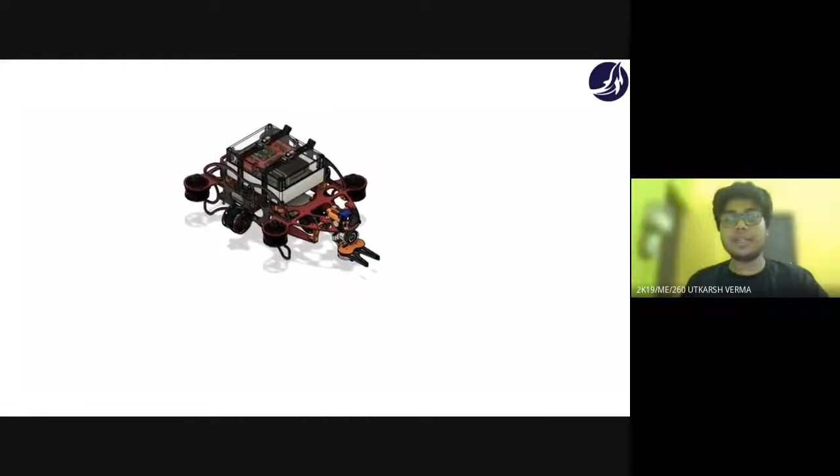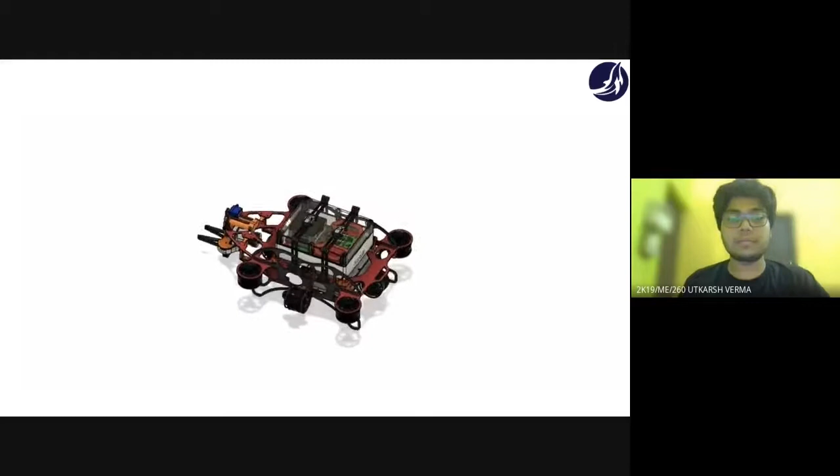I'm Utkarsh Verma, a second year mechanical engineering student at the Delhi Technological University. I was responsible for the design of the chassis and manipulators of the vehicle. Hi, I am Saurav Ranjan, second year electrical engineering student at Delhi Technological University, and I was responsible for the power distribution system in Lapras.

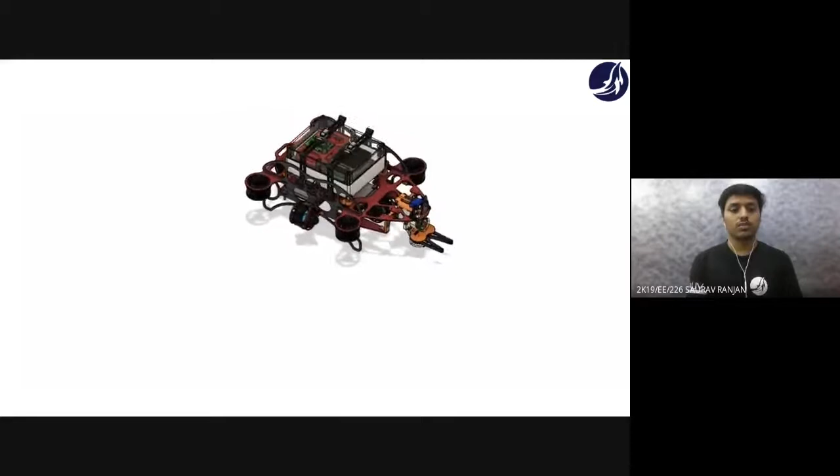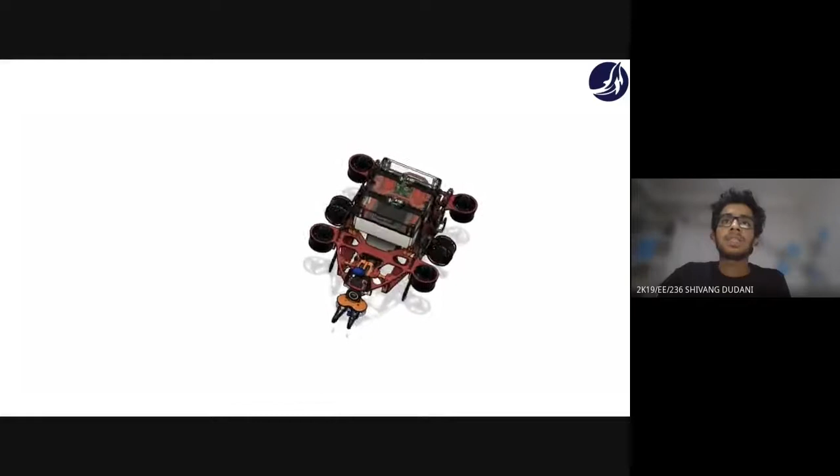Hello everyone, my name is Shivang Dudani and I am currently in second year studying electrical engineering at Delhi Technological University. I worked on the battery management system of Lapras. Hi, my name is Sriram Chava and I am a second year electrical engineering student at DTU. I was responsible for the development of the higher level control subsystem of Lapras.

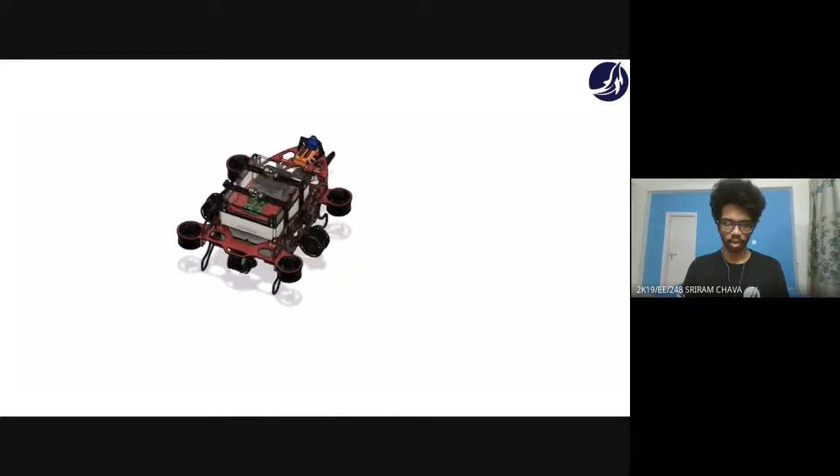Since the revival of DTU AUV in 2016, 2021 will mark our first time participating in RoboSub. Therefore, our approach to developing Lapras was to aim for a minimalistic design capable of all tasks, which would give us valuable lessons for future competitions. Compared to our previous vehicles, we have designed an economical, compact, and lightweight vehicle, which is a significant improvement since it incorporates an acoustic stack and 6 degrees of freedom.

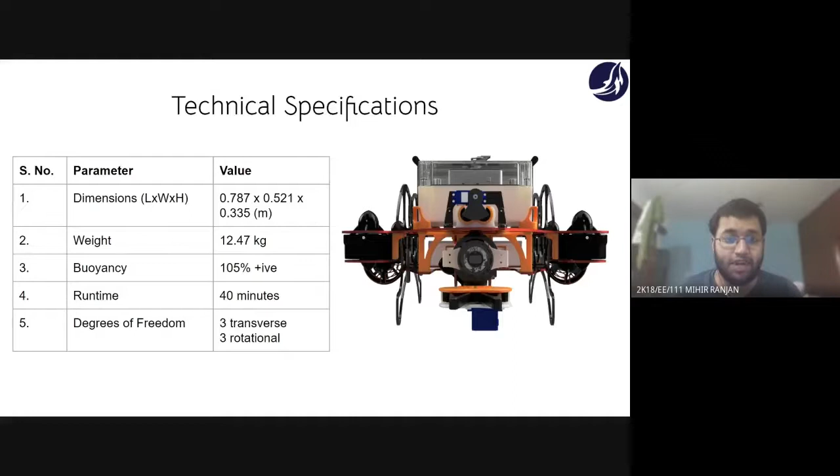The frame of Lapras is the main supporting structure in the assembly and is well optimized to avoid stress concentration and to sustain the loads without any considerable deformation or failure. It uses 4 mm thick 6061 T6 sheets as the material. Since the frame is based on a plain truss structure, water jet machining is used as a manufacturing method, and this sheet metal structure is supported by custom brackets.

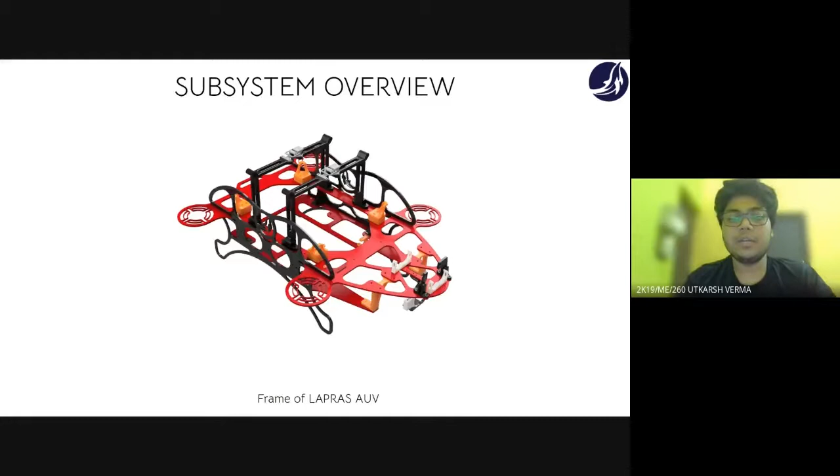The base plate supports the electronics hull, the front camera hull, 4 heave thrusters, 2 sway thrusters, torpedo launcher, and the gripper. Each side plate holds a surge thruster for a total of 8 thrusters on the vehicle. The bottom plate supports the battery hull, bottom camera hull, and dropper. The design of the frame ensures easy assembly and accessibility to every component attached to it. Since 4 thrusters are used for heave, the thrusters are allowed to run at the optimal PWM values, giving higher efficiency while submerging.

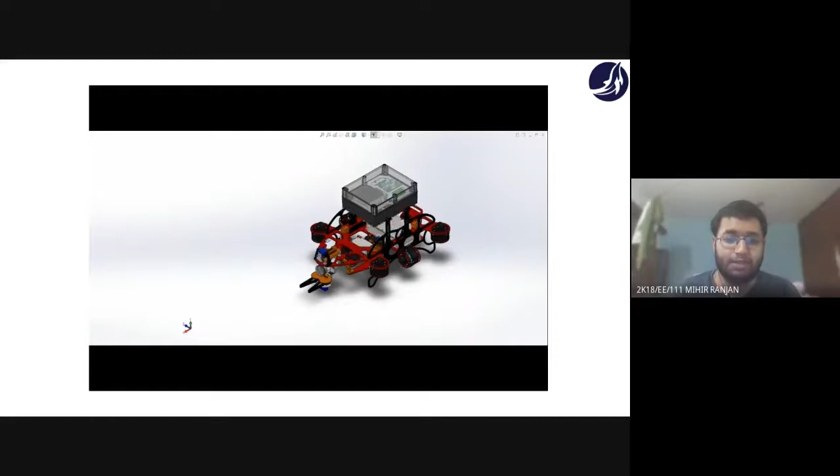Since we're targeting all the tasks, a major challenge we faced was reducing the complexity of the system while keeping it compact. From previous vehicles, most of the bulk in our system was a consequence of extensive wiring inside the hull. Over the past few vehicles, we have aimed to reduce this wiring by utilizing custom developed boards and PCB traces for both signal and power distribution. The boards are kept apart to avoid interference between the signal lines and high current power lines.

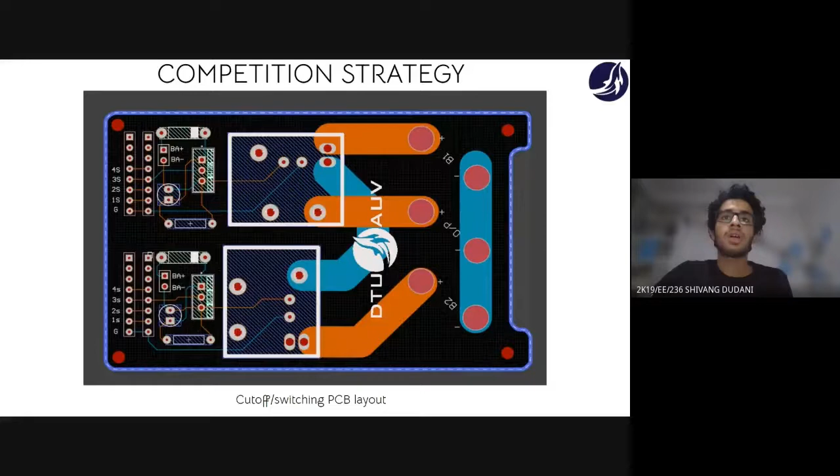Power management in Lapras is done by the power subsystem. The main power source of the vehicle is two 4-cell 10,000 mAh LiPo batteries. These batteries are placed in an aluminum hull to allow better cooling and easy replacement of batteries during testing. At a time, only one battery is used and a custom battery cutoff and switching board was developed to cut the main battery and hot swap to the backup battery to prevent deep discharge for both batteries.

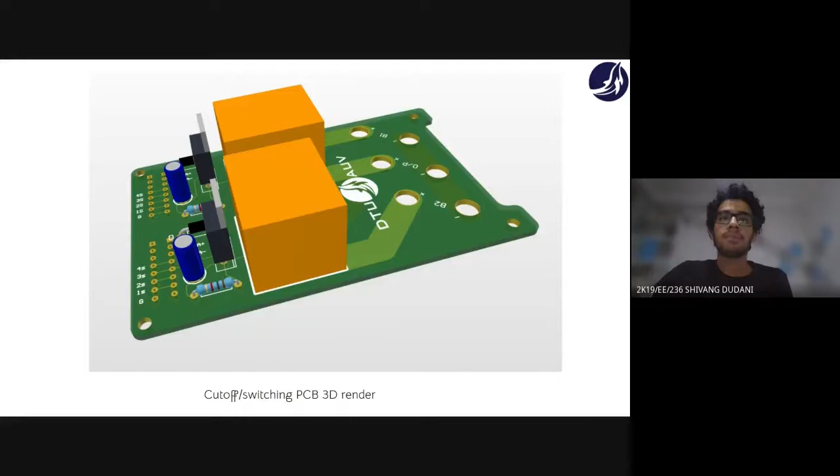The PCB utilizes high current relays from TE Connectivity and uses the balance connector of the LiPo battery to measure the individual voltage of each of the 4 cells and switches the battery at the required time. The output from the battery hull is fed into the custom designed power distribution board with 7 volt and 5 volt rails. The battery voltage is fed into the ESC, hydrophones and the DC-DC NUC.

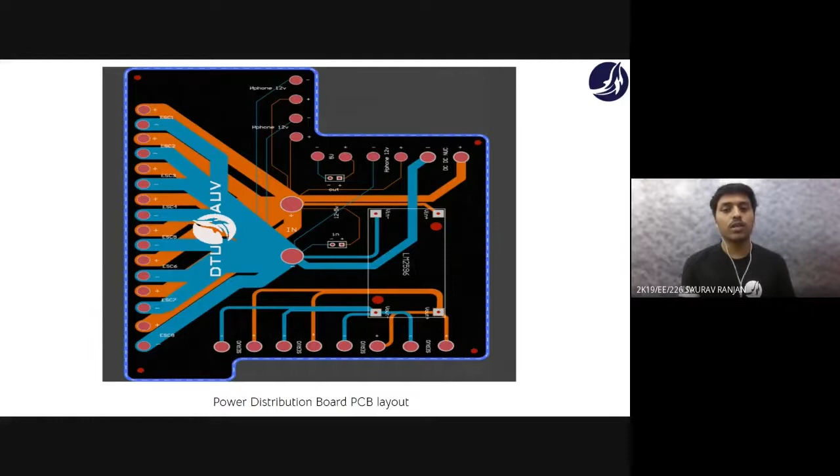An IP68 double pole double throw kill switch is also used to shut down Lapras in case of an emergency as a failsafe. It is connected to the input of the DC-DC NUC and is located outside the AUV for easy access. The 5 volt rail supplies power to the acoustic evaluation kit and the 7 volt rail supplies power to all the servo motors.

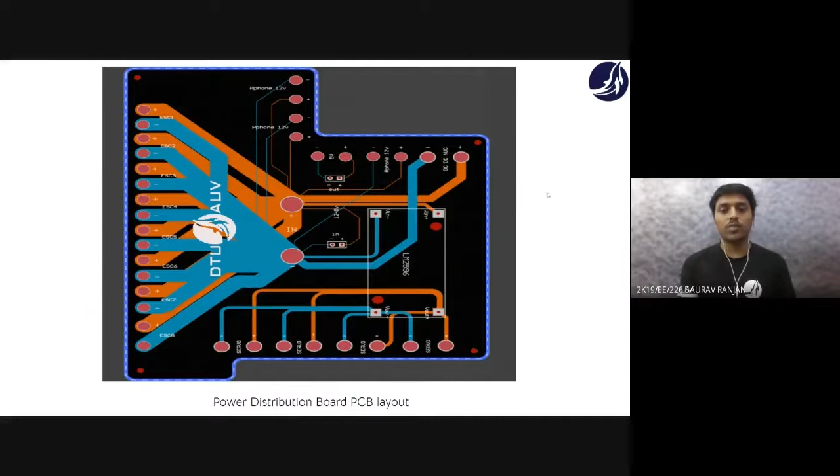In our previous vehicle, we had silicone wires distributing power to all the components. This made the entire electronic stack very messy and also led to slow debugging. So the entire system was replaced by a single PCB which replaces wiring with traces conforming to IPC norms, making the entire system more compact and modular. We tested the PCB traces on the previous design of power distribution board and found their current carrying capacity to be sufficient.

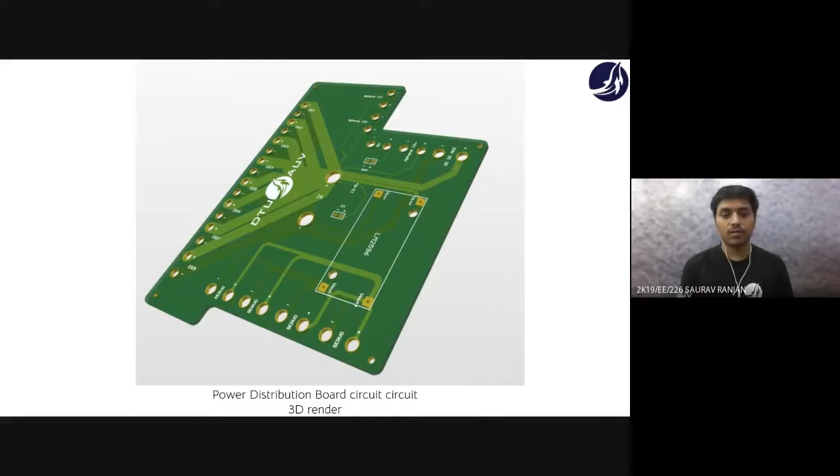Lapras' higher level control subsystem has a custom designed board that acts as a shield for Arduino Mega. The custom designed board also provides an interface for all the sensors, thrusters, and the servo motors. The main control subsystem consists of an Intel NUC and the DC-DC NUC. The NUC serves as the central processing unit of Lapras and carries out all the image processing, acoustic signal processing, path planning, and other algorithms.

The DC-DC NUC is a dedicated boost converter that outputs a regulated 19-volt supply to the NUC to prevent any damage. The acoustic subsystem consists of 3 hydrophones, MAX11043 ATL evaluation kit for evaluating the hydrophone data, and the LaunchXL F28379D, which is responsible for processing all the data and relaying it to the NUC.

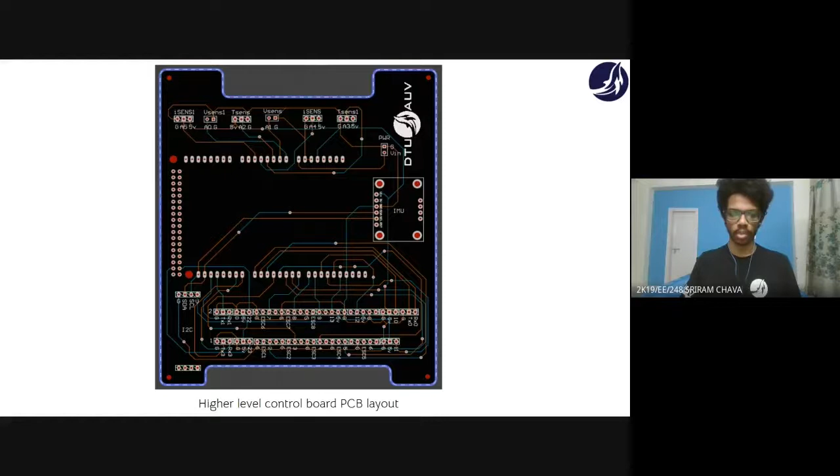A well-defined electronic structure, as in the picture, allows us to incorporate all necessary sensors and manipulators in a very compact space. We aimed for a runtime target of 40 minutes, hence a total capacity of 20,000 mAh was chosen.

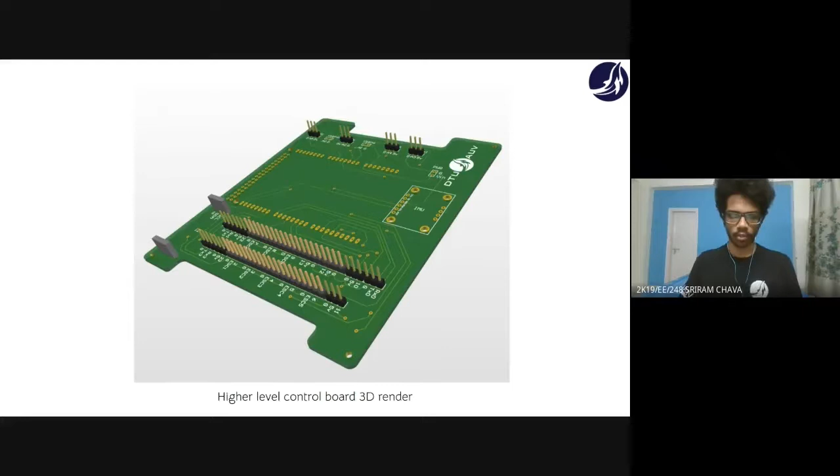For the With Moxie task, the gate will be detected by the front camera using the yaw sweep after the AUV has submerged. For the Choose Your Side task, the AUV will go through the G-man section due to more well-defined images. To earn the style points, maneuverability is of key importance. Hence, 8 thrusters with 6 degrees of freedom have been employed in the vehicle.

All the ESCs are located collectively on a mount and are located at one end of the hull. The PDB is kept in close proximity to the ESC mount, greatly reducing the wiring. Throughout the electronics rack, multiple slits have been given to make the wiring shorter and make the components more accessible.

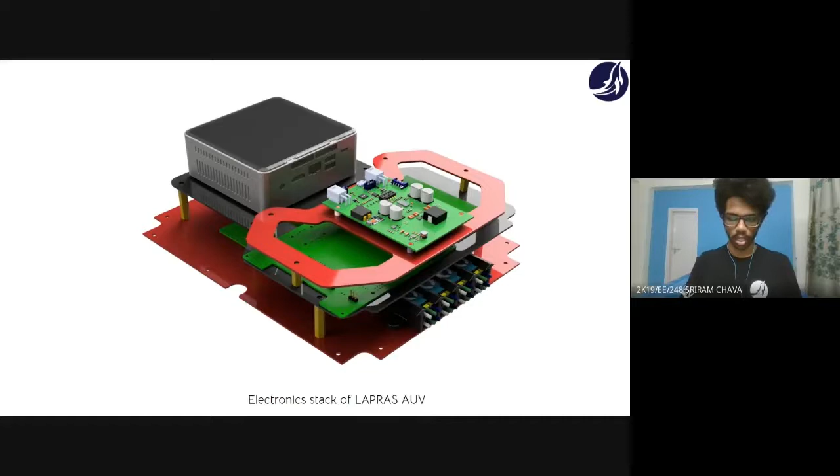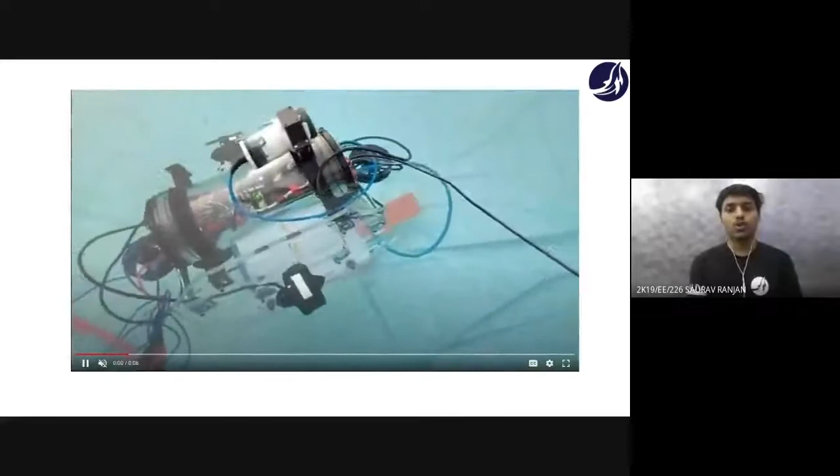For the above 2 tasks and the Make the Grade task, 2 USB webcams, one at the front and one at the bottom, have been used. They are powered by the NUC. The NUC processes the images from the camera and finds the path leading to the buoy. After that, it looks for the path leading to the collecting task. The bottom camera is used to continuously track the orange path and get to all the tasks.

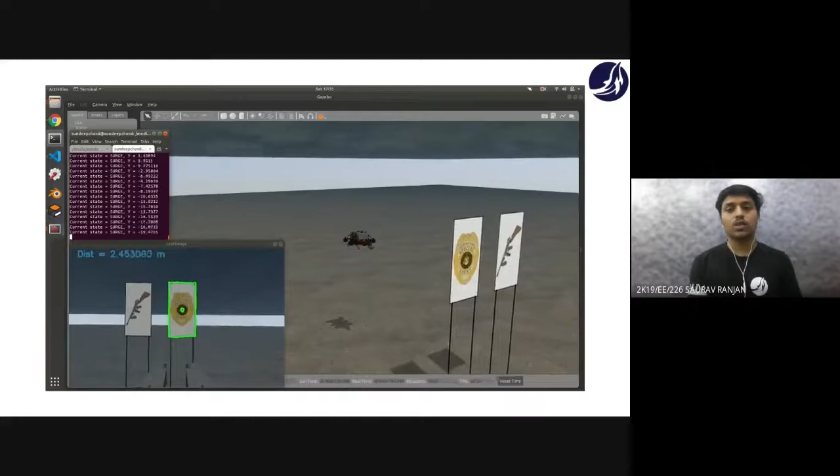The IMU BNO055 is placed such that it is in the center of gravity for the most accurate orientation estimate. All manipulators are controlled by HS5646WP servo motors, having an operating voltage of 7 volts and a stall torque of 12.9 kg-centimeter.

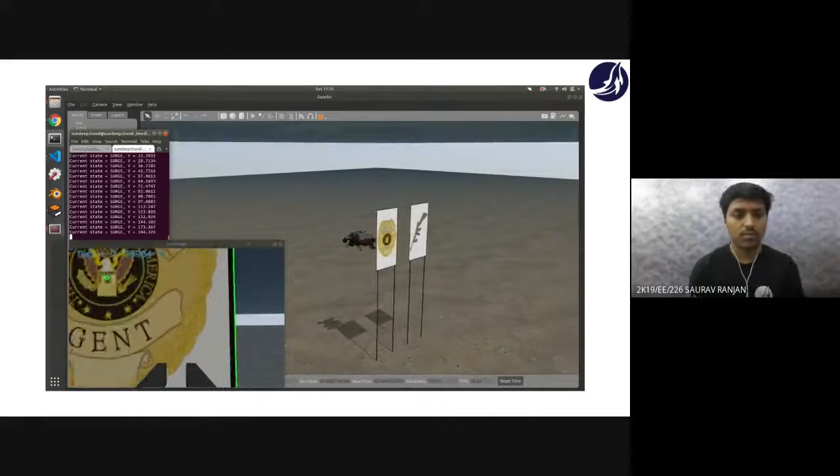A double-barrel dropper controlled by a single servo motor is used for the collecting task. The lid of the bin will not be lifted and a drop will be attempted in the bin by processing the G-man image. For the Survive the Shootout task, a double-barrel torpedo shooter has been implemented, which is controlled by another servo motor. Both the torpedo and the dropper barrels have been designed such that there is a minimum distance between the 2 barrels for maximum accuracy. This also increases the success rate as we get 2 chances to drop the ball and shoot torpedoes.

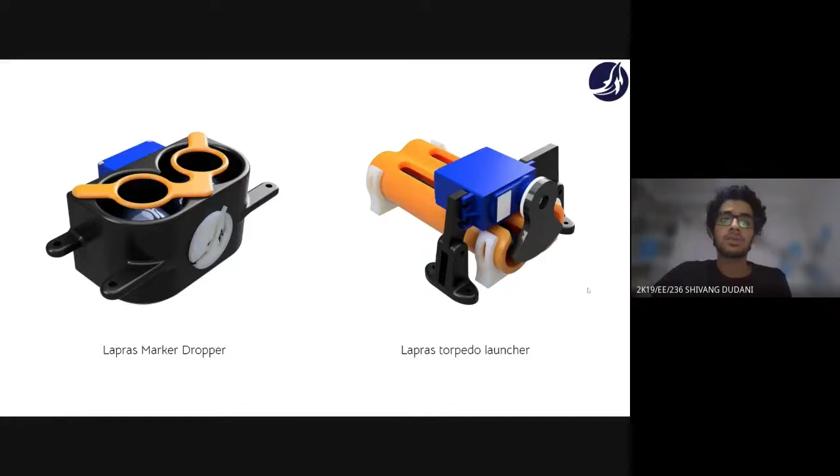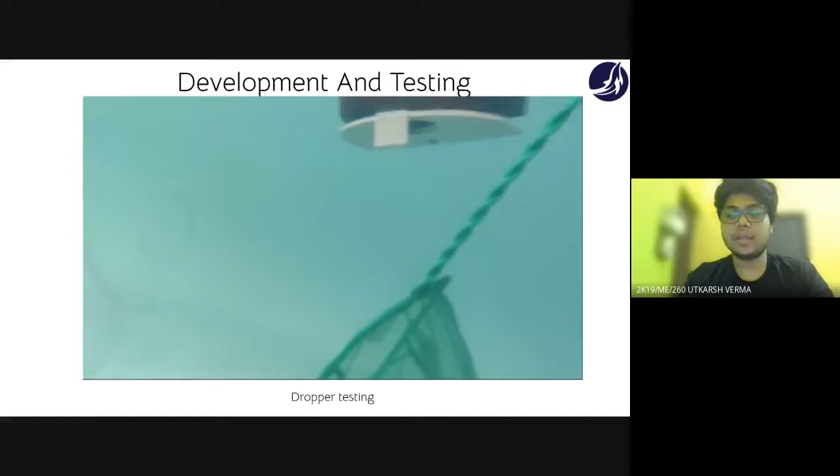We have used a servo for the dropper mechanism. The first ball is dropped when the servo rotates to 30 degrees and the second ball when the servo moves to 60 degrees. We have tested the mechanism on a previous design during the testing phase and achieved a good amount of accuracy.

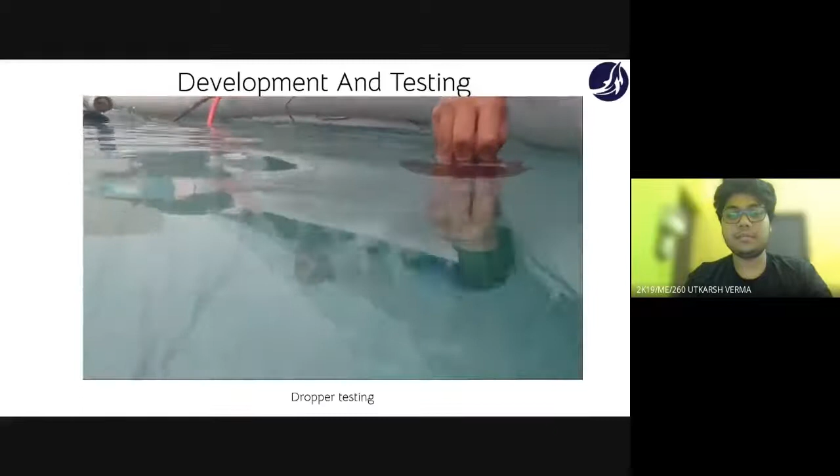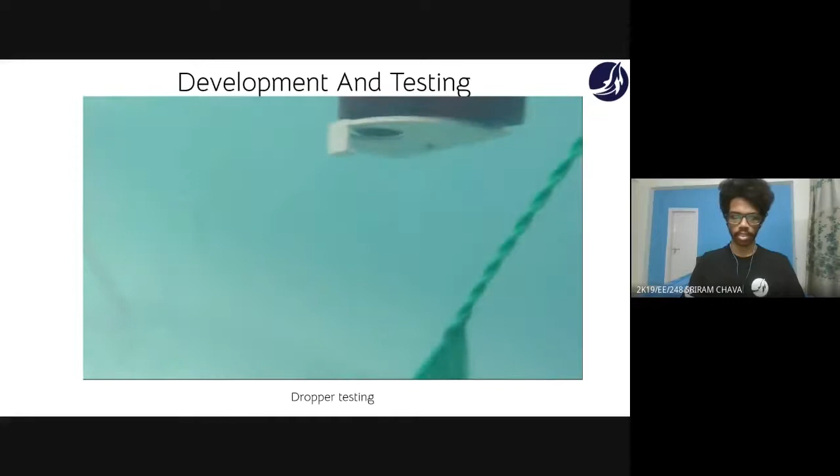The PCBs and PDBs are designed to reduce the wiring in the vehicle and hence reduce the chances of errors. This made debugging easier and made the E-tray less bulky. Initially, a prototype was developed, after which the PCBs were designed and manufactured. The previously developed PCBs and PDBs were extensively tested. This year, we have improved the design and added several new capabilities in the PCBs. But the new PCBs could not be produced or tested due to the lockdown restrictions in India.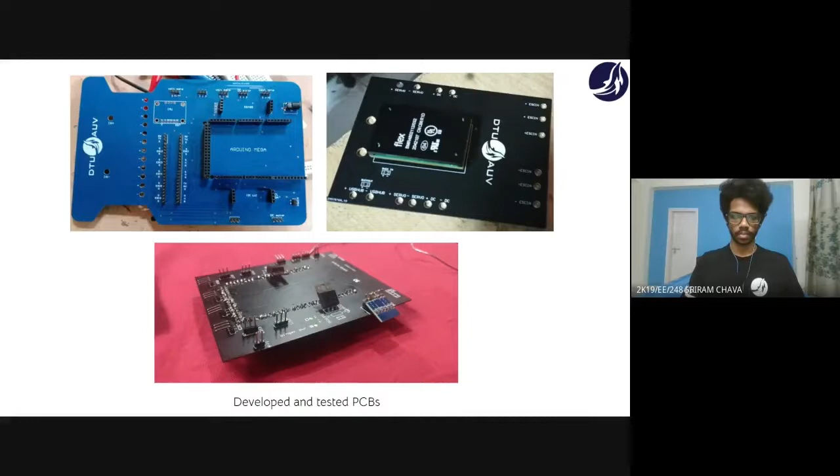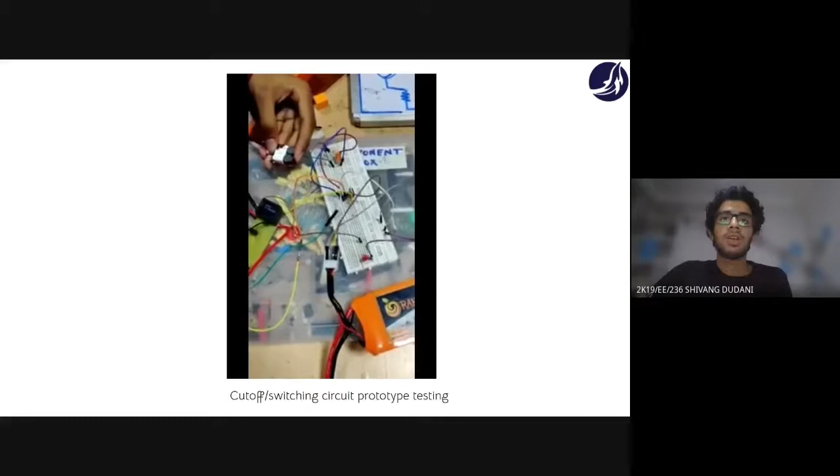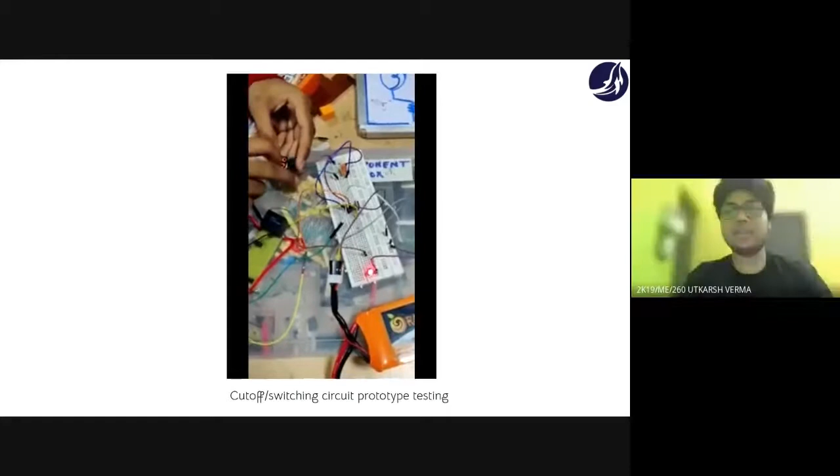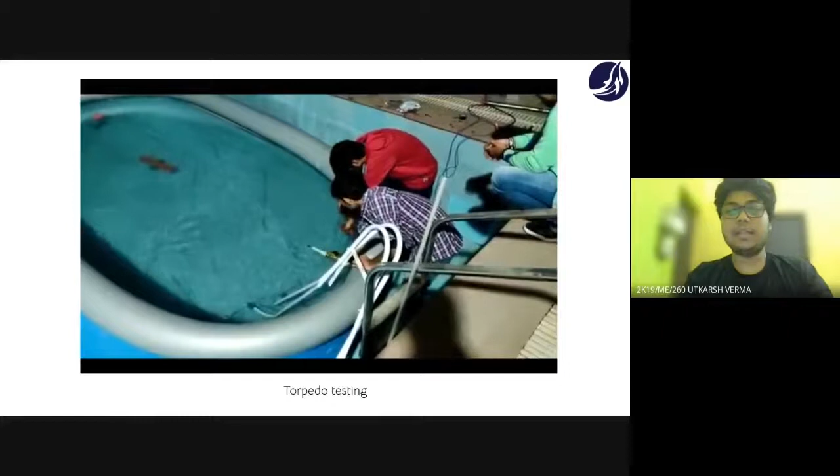In our previous developments, we used a compressed air-based torpedo system. However, that system was bulky and showed considerable losses in pressure. It could provide only a single operation. Hence, this time we are using a helical spring-based launching mechanism that is much lighter, easy to work with, gives 2 chances at the task, and showed reliable results in the initial phases of prototyping.

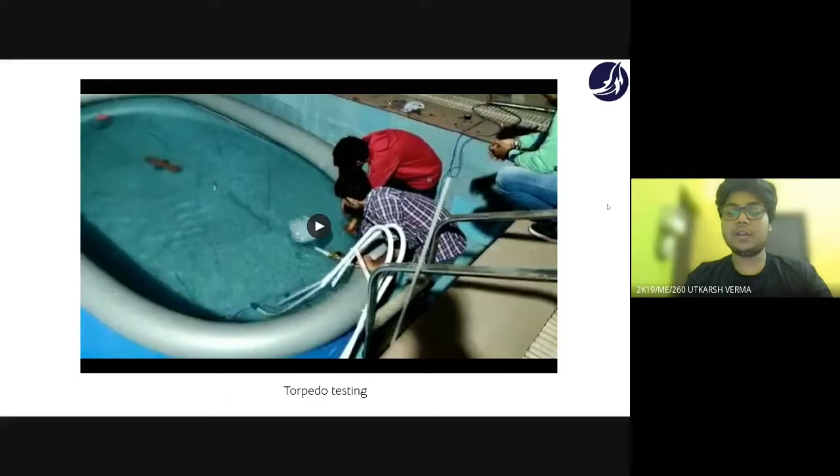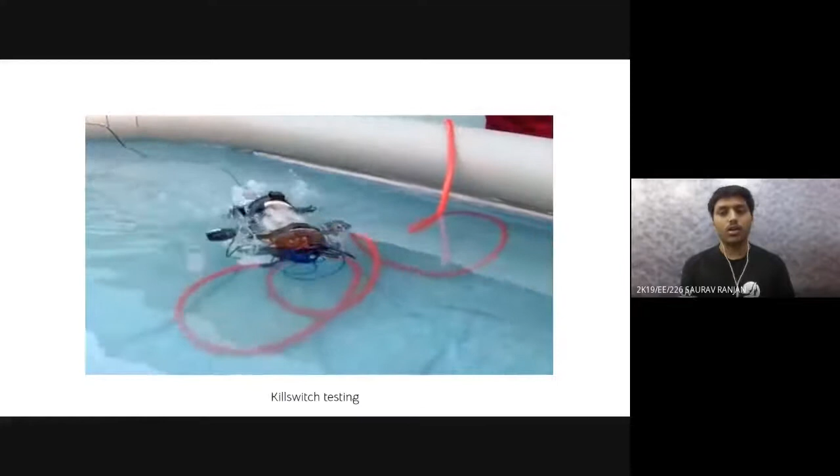The kill switch was tested on the prior vehicles and we are utilizing the same switch again. By shutting down the power to the central computer, it stops all thrusters and brings the bot to a halt. Since we have tested our image recognition algorithms extensively and have done in-water testing with path and buoy on a prototype vehicle, we're extremely confident in our completion of these tasks.

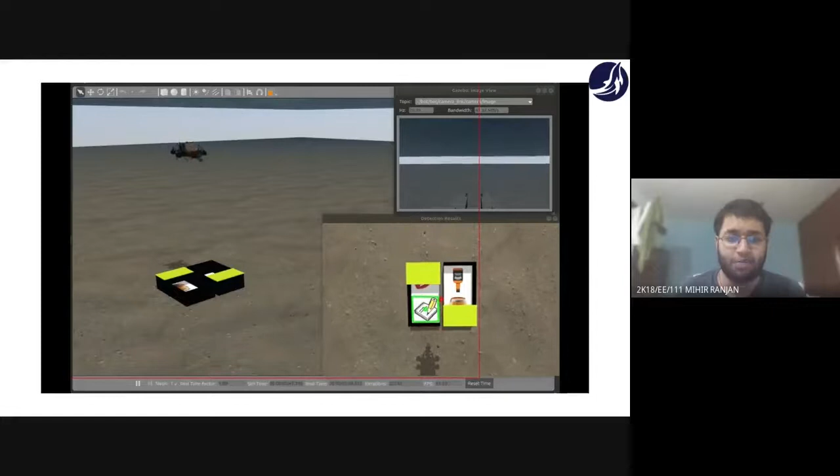Our dropper has been tested underwater and on a prototype vehicle. We've also simulated the task in a Gazebo environment and have been able to detect the correct bin without having to lift the lid. Therefore, we're extremely confident for this task too.

We have tested a pneumatic torpedo launcher in the past and modified the torpedo and launcher design respectively for better accuracy. However, we have yet to test this rendition of the torpedo underwater, but are still quite confident with our design. Detailed strategy about the other tasks is covered in the second skills video on sensor optimization.